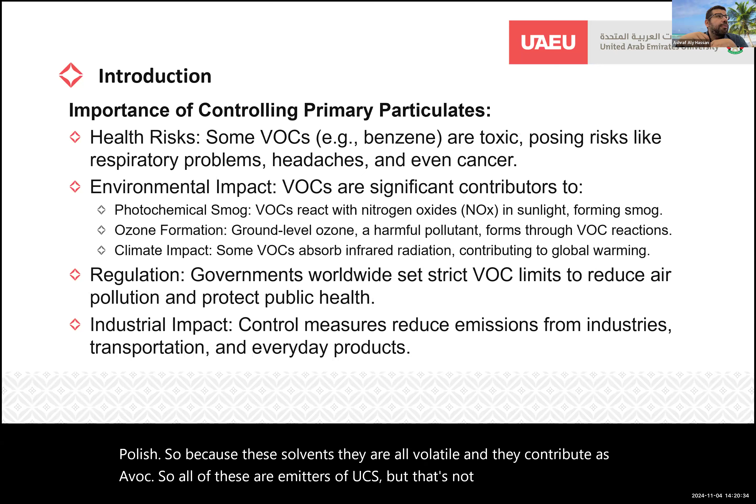So all of these are emitters of VOCs, but that's not it. Oil and gas - and that's a very big contributor here in the UAE - that's a very big emitter of VOCs. There are direct VOCs which are emitted just by exploration. When you are looking for methane, natural gas, when you are looking for oil, there is always gas that's with it, and this gas is VOC.

Remember, the VOC is finally a hydrocarbon. If you go back to the class on organics, so it's all hydrocarbons, similar to methane - you can always burn them and use them as fuel. So they are part of the oil and gas layers. So when you are exploring and opening new concessions for oil and gas, you are actually releasing a lot of VOCs. And this is new - that was not really known before. They started the first regulation about VOCs from oil and gas exploration in 2015. See, this is always an evolving field.

VOCs not only from exploration, but also from any combustion. So anything that combusts - an engine that combusts - it also produces some VOCs. Why? Because of incomplete combustion. Remember always that gasoline is also a hydrocarbon, and when you are burning it, some of it is being transformed into VOCs instead of being completely combusted into CO2. So you always get VOCs coming out of combustion as well. There are also other natural processes that emit VOCs, such as fermentation.

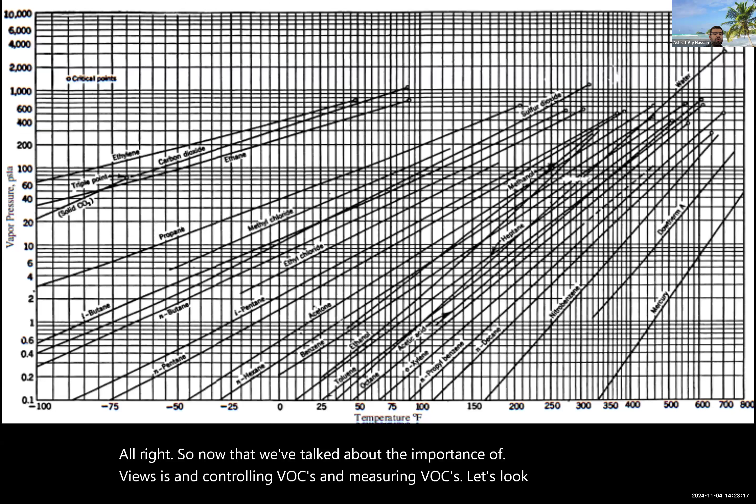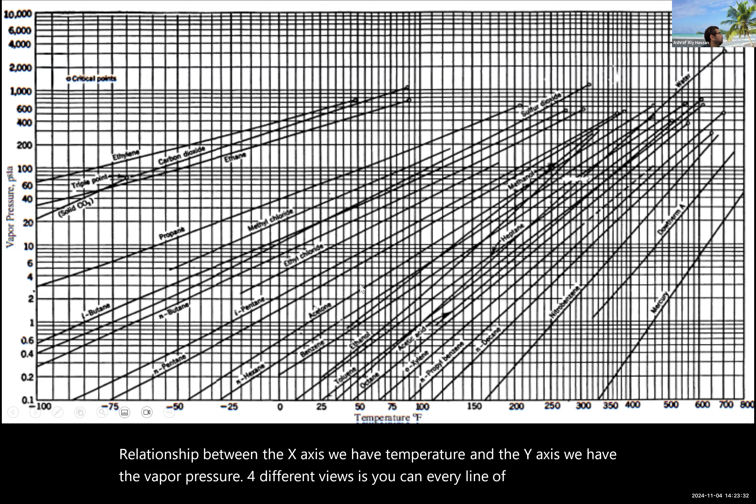Now that we've talked about the importance of VOCs and controlling VOCs and measuring VOCs, let's look at this graph. This graph shows the relationship between the x-axis, temperature, and the y-axis, vapor pressure, for different VOCs. Every line here is a different VOC. We can use this graph to estimate the vapor pressure at a given temperature.

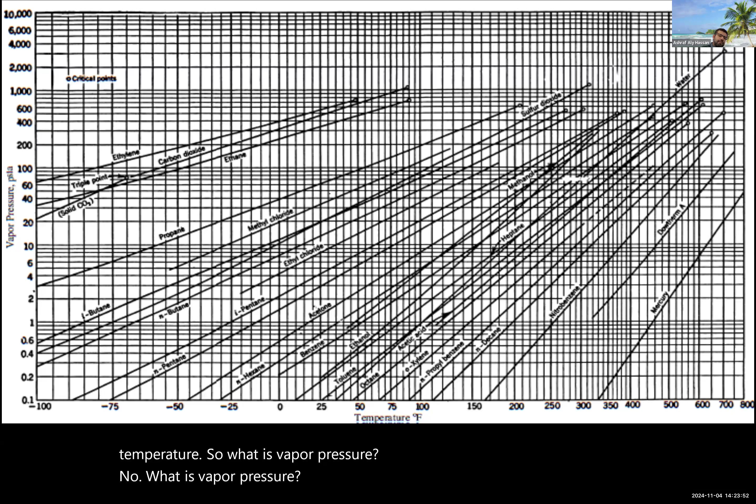So what is vapor pressure? Anybody? No? What is vapor pressure? Okay, so the definition of vapor pressure is the pressure

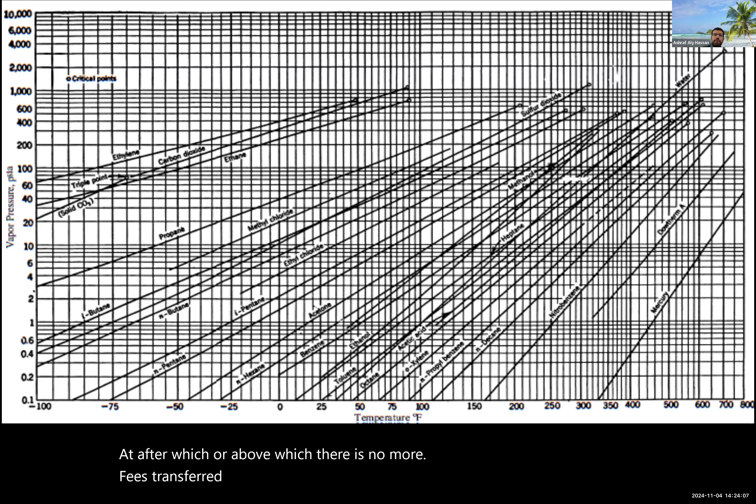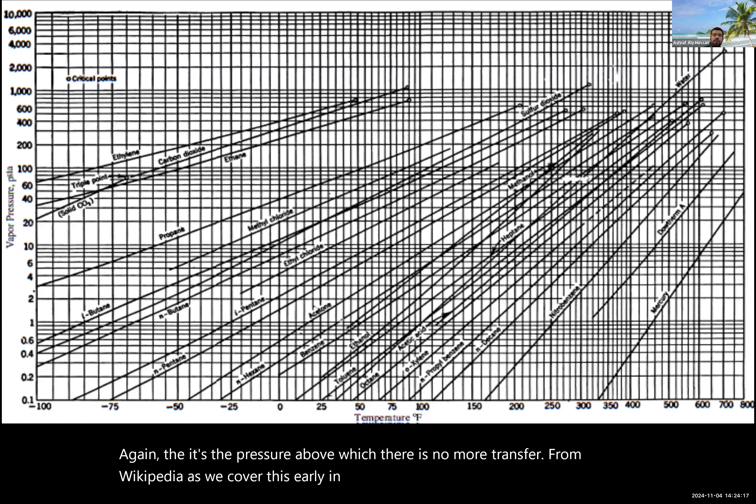after which, or above which, there is no more phase transfer from liquid to gas. Again, it's the pressure above which there is no more transfer from liquid to gas. We covered this early in the class—remember saturation, subsaturation, supersaturation. This is the vapor pressure.

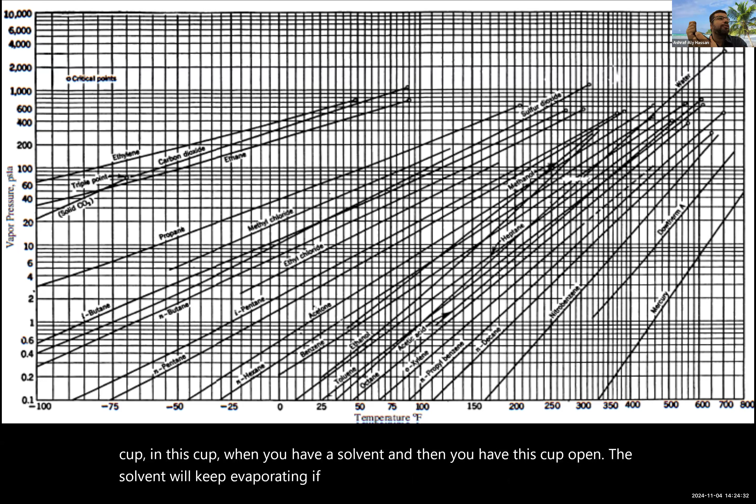When you have a solvent in this cup, and the cup is open, the solvent will keep evaporating. If you leave it a few days, you will not find the solvent anymore. That's true, right? You've seen that—you put stuff in a cup and come back a few days later and don't find it. If you close it and make sure it's completely sealed, some of it will evaporate, but after a few days you'll come and see the rest of it.

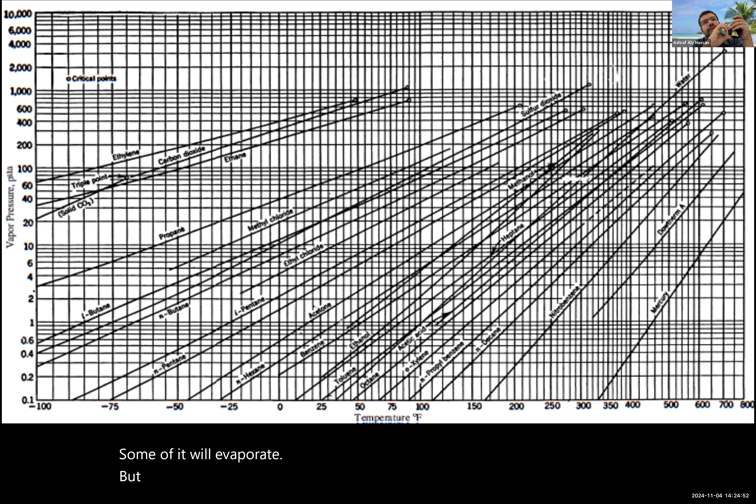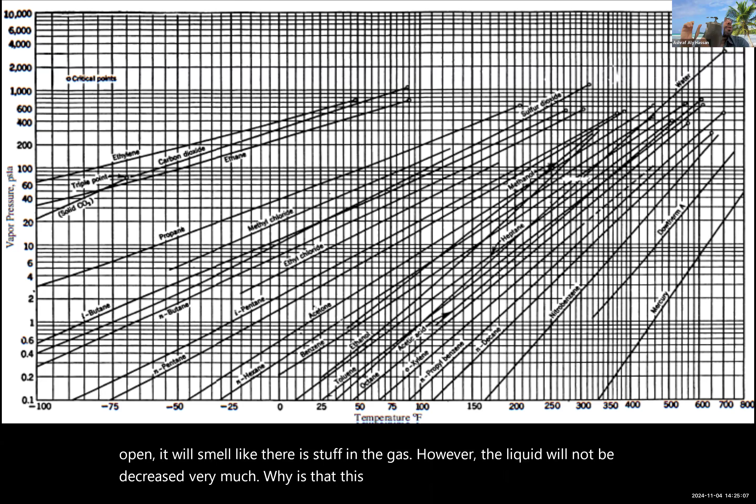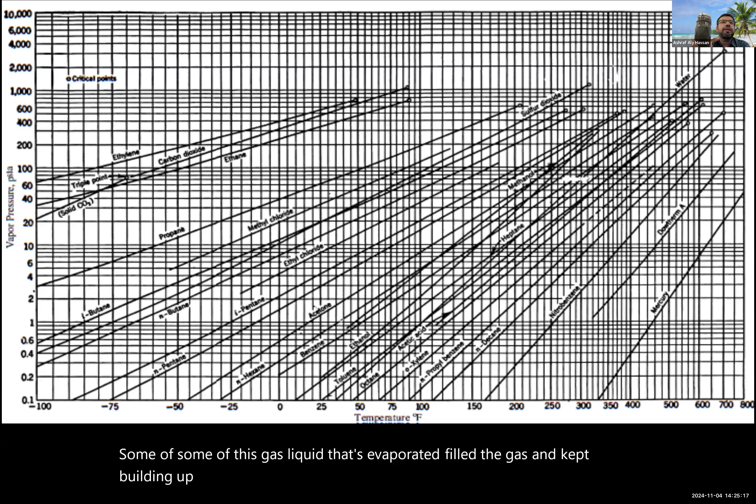It will smell when you open it—it will smell like there is stuff in the gas. However, the liquid will not be decreased very much. Why is that? This is because some of this gas liquid that's evaporated filled the gas and kept building up pressure in the headspace until we reach the vapor pressure. Once we reach the vapor pressure, no more liquid can evaporate.

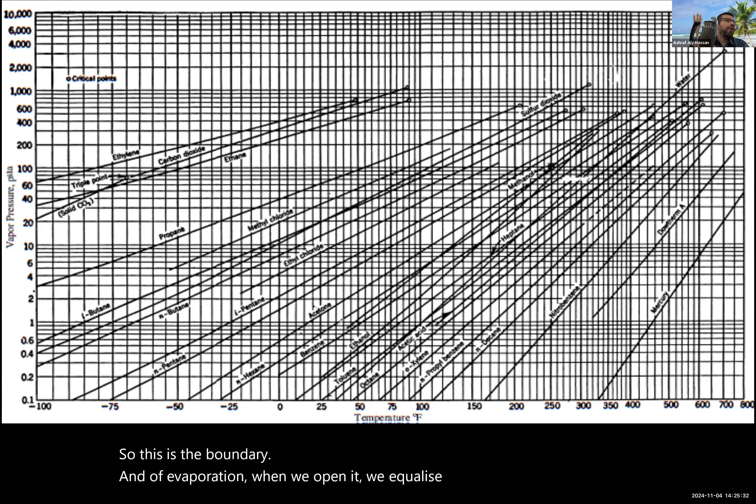So this is the boundary of evaporation. When we open it, we equalize pressure, and now it can evaporate again. As long as it's closed, we are building up pressure. Does it make sense? And where do we get the vapor pressure? From this figure over here.

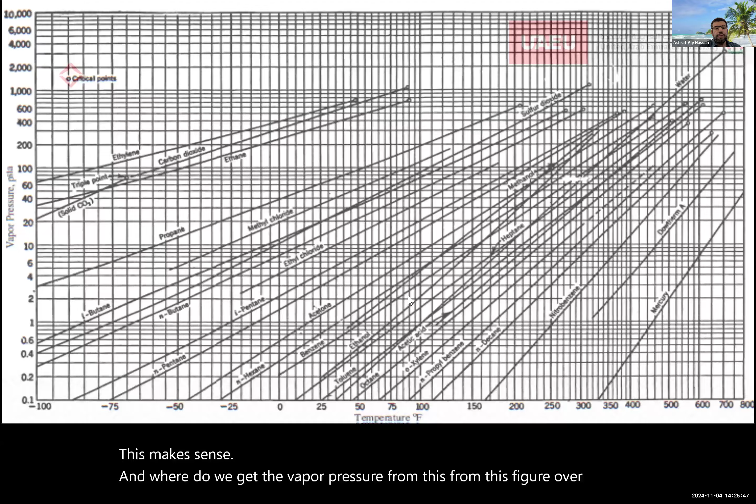So the first law that is very important when we are talking about VOCs is Raoult's law for VOC mixtures. Raoult's law helps us predict the concentration of VOCs in the air when in equilibrium with their liquid form. Yi equals Xi times Pi over P, where yi is the mole fraction of component I in the vapor phase, xi is the mole fraction of component I in the liquid phase, pi is the vapor pressure of pure component I, and P is the total pressure of the system.

So the mole fraction of I in the vapor is equal to the liquid times the vapor pressure over the total pressure. And you can really understand that yi over xi, which is vapor over liquid, is equal to the vapor pressure of the pure compound over the total pressure.

So here is an example: calculate the water vapor content in air in equilibrium with pure water at 68 Fahrenheit, which is 20 Celsius. Here we'll assume that xi is 1, because it's water—that's the concentration of water. It's 100% water in the liquid phase. Small amount of air dissolved in water is negligible.

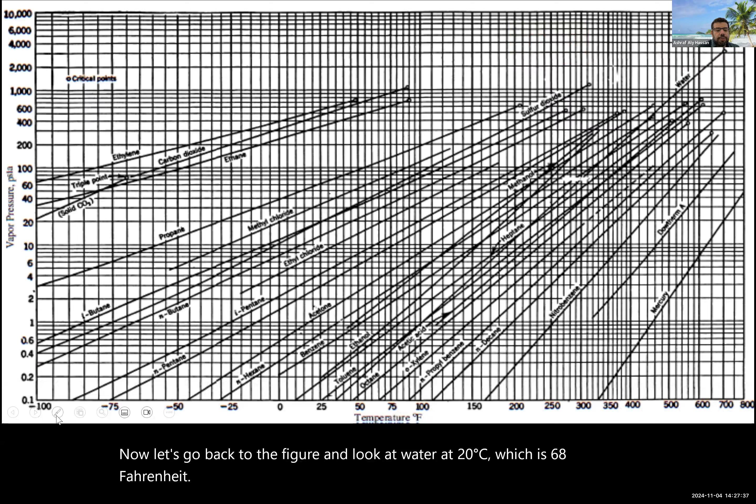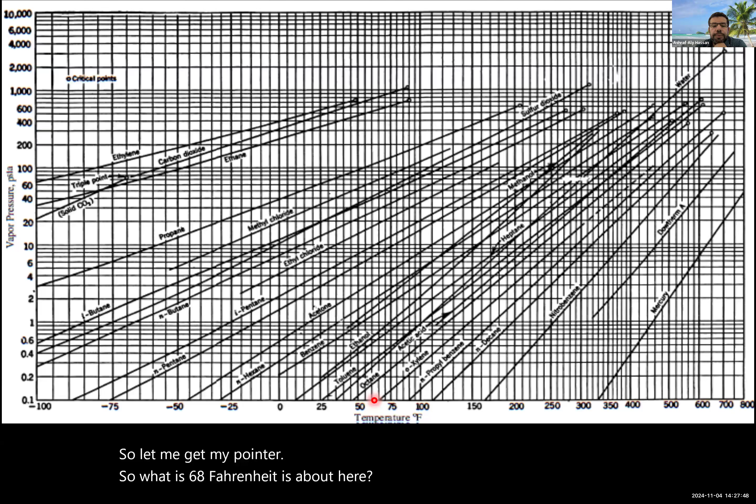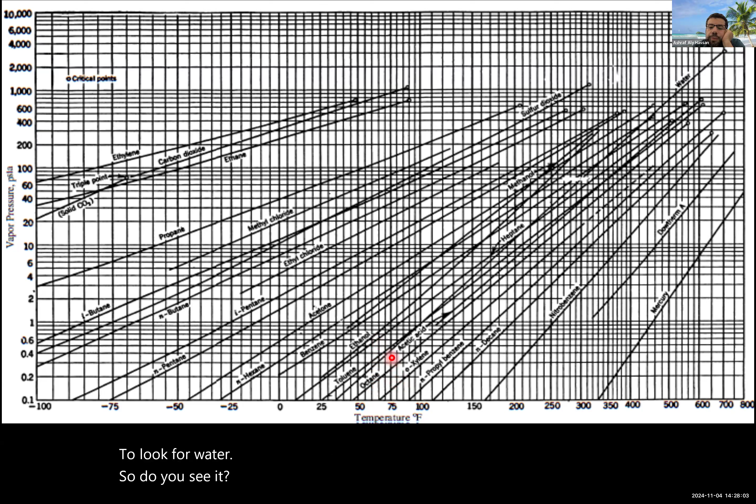Now let's go back to the figure and look at water at 20 degrees Celsius, which is 68 Fahrenheit. Let me get my pointer. So where is 68 Fahrenheit? It's about here, and we'll go up to look for water. Do you see it? I really don't. Where is it? This one.

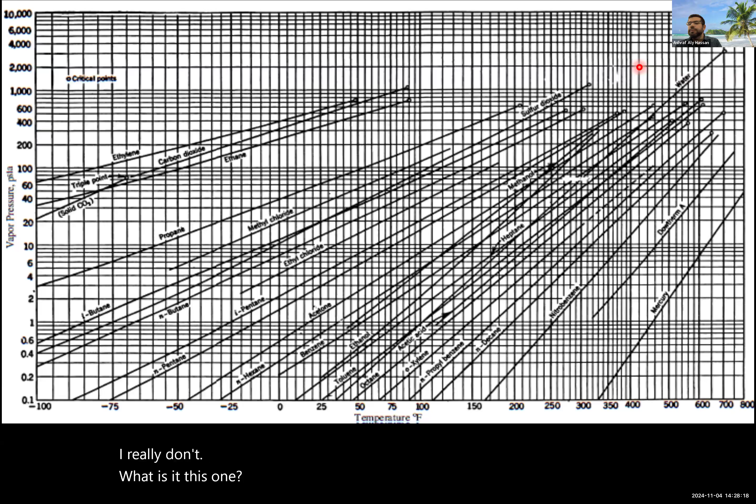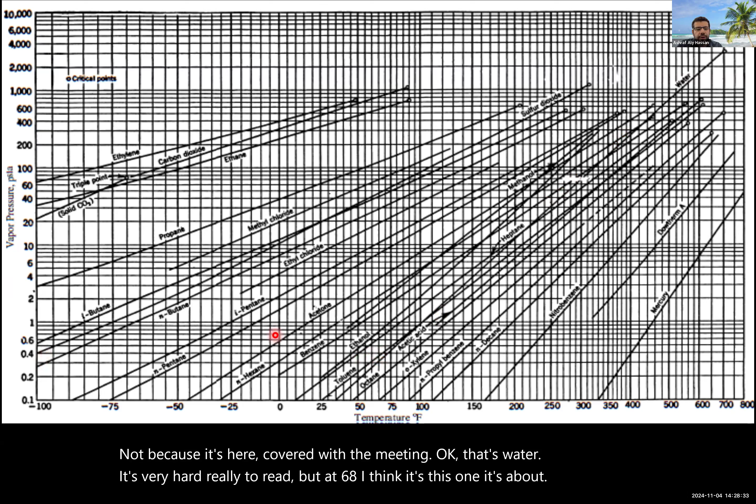It's covered with the meeting overlay. Okay, that's water—it's very hard to read, but at 68, I think it's this one. It's about 0.4 or 0.5 psi. Let's see what it was—2.3, yeah, it was 0.023.

That's in atmospheres, but you can convert from PSI to atmosphere, or use Raoult's law directly with PSI. The most important thing is that this ratio, Pi over P, has the same units. So you can have P in PSI or atmosphere, just make sure both are consistent. So then it is 1, our assumption, times 0.023 atmosphere over 1 atmosphere, which equals 0.023—that's the mole fraction of water vapor in air, or 2.3%.

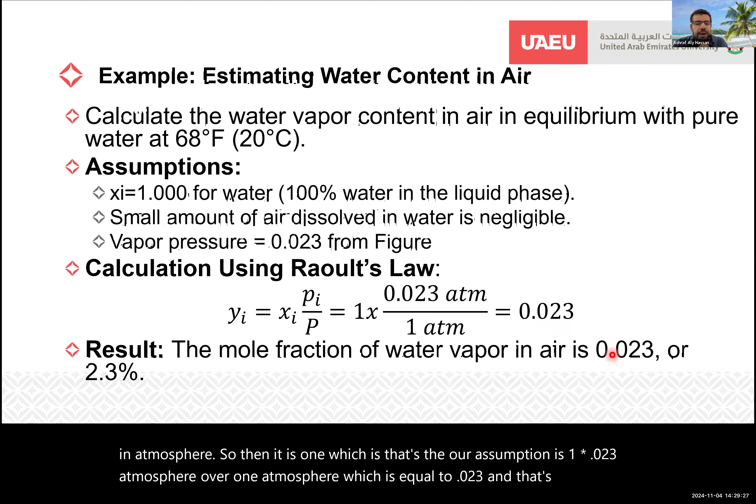Next example is about the calculation of the vapor phase composition of a 50-50 mole percent benzene toluene mixture in equilibrium with air at 68 Fahrenheit in a closed container.

Given data: mole fraction of benzene in liquid is 0.5, mole fraction of toluene in liquid is 0.5, so they are 50-50. Vapor pressure of benzene is 1.45, from the figure. Vapor pressure of toluene is 0.42. Total pressure is 14.7. So we will apply Raoult's law once for benzene and once for toluene.

Then that's 0.049. Similarly for toluene.

So in order to get the Y for the air, that's 1, the total, minus the fractions of the benzene and the toluene. So 1 minus 0.049 minus 0.014, which is equal to 0.937.

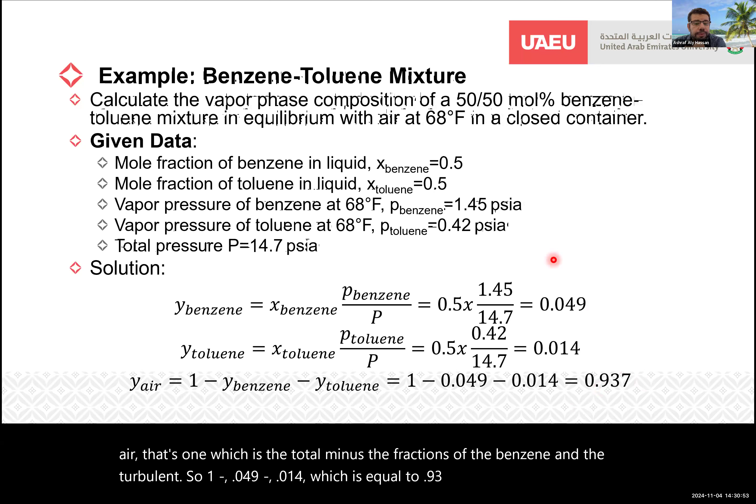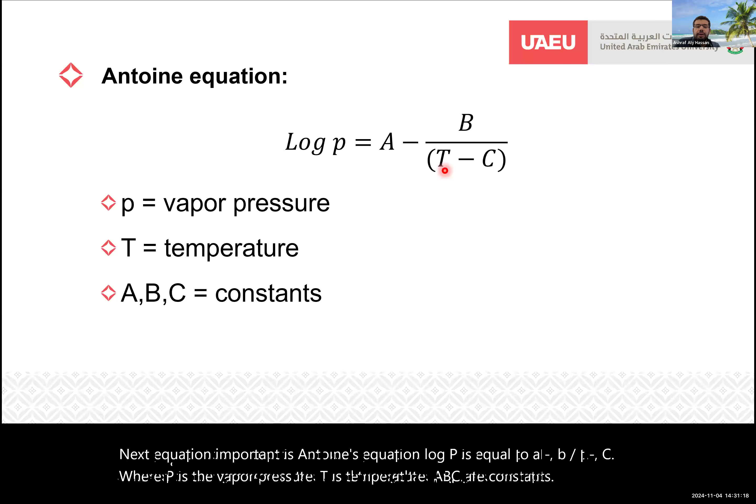Next equation, important, is Antoine's equation. Log P is equal to A minus B over T minus C, where P is the vapor pressure, T is temperature, A, B, C are constants. You can either be given this or you can get A, B, and C from tables.

So estimate mercury's vapor pressure at 20 degrees Celsius by extrapolating data using the Clausius-Clapeyron equation, which is the same equation. Vapor pressure at 329 Fahrenheit, given data, equals 0.1 psi. Vapor pressure at 700 Fahrenheit equals 18.93 psi.

Temperatures converted to Rankine. Rankine is like Kelvin in the British system. So 329 plus 460 equals 789, and 700 plus 460 equals 1160.

Now we use this equation. We'll do it twice, once for the first condition, once for the second condition.

So log 0.1 is equal to... yes, in this case we are looking for the constants. But sometimes, most of the time actually, the constants will be given for direct application.

So log 0.1 equals A minus B over 789, and log 18.93 is equal to A minus B over 1160. Solving for constants A and B, we get A is equal to 6.11993, and B is equal to 5617 Rankine. So we'll use the equation.

Log P is equal to A minus B over T minus C. Now we know A, we know B. T minus C, in this case at 20 Celsius, is 528, which will be equal to minus 4.519.

Here are just the values of P in different units. The T required in the example is at 20 Celsius. So it gives us two values, 329 and 700, but the question is asking about 20. So basically we use these two to get the constants, and then we reapply the constants to get it at 20.

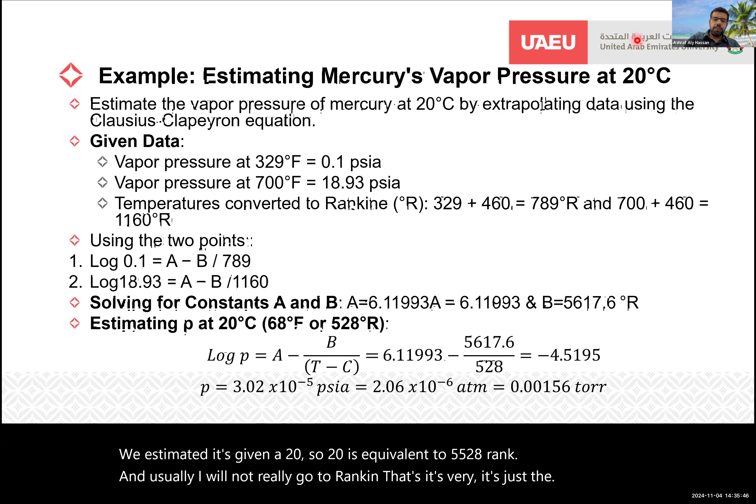We estimated it's given at 20, so 20 is equivalent to 528 Rankine. Usually I will not really go to Rankine, it's just for this example. So here you go.

Log P equal to negative 4.5. So you want to inverse log 4.5, negative 4.5 — not inverse, shift log negative 4.5. That is equal to 3.02.